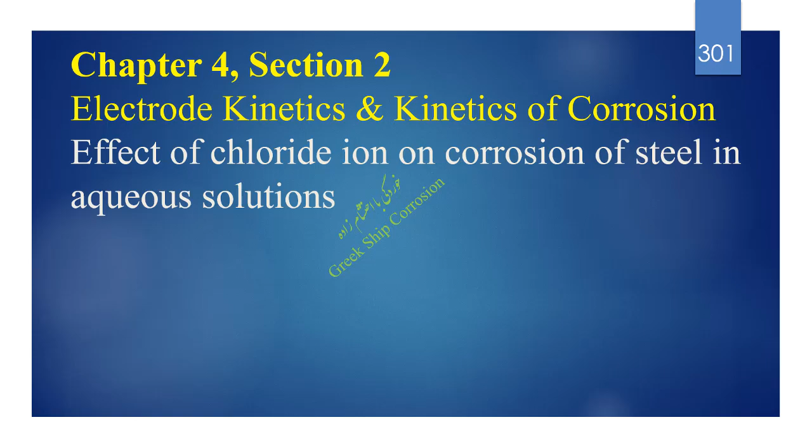The Greek ship, Shipwrecks and Maritime Incidents in 1966. The Greek ship is the nickname of Koula F. She was built in 1943 under the name Empire Trumpet. From 1946 to 1966, she passed through a series of British and Iranian owners and various changes of name. Her final owners were Greek.

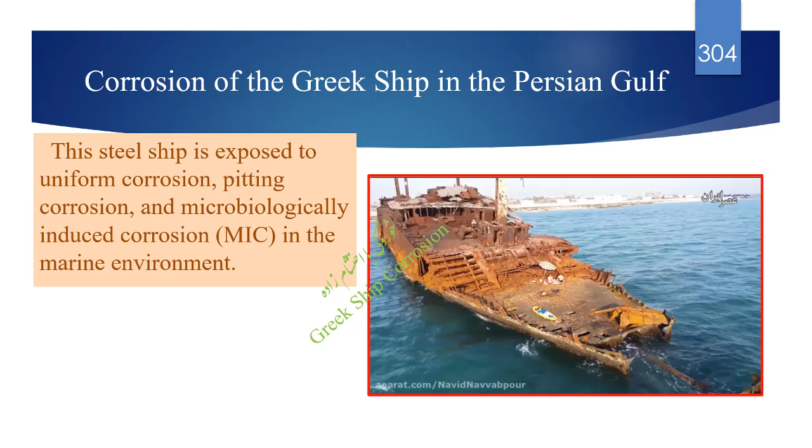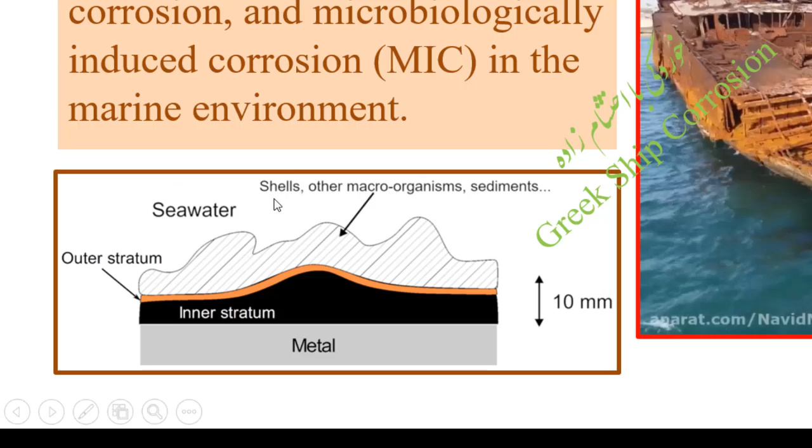On July 25, 1966, Koula F ran aground on the southwestern coast of Kish Island in the Persian Gulf. This wrecked and corroded ship has become a tourist attraction in Iran. This steel ship is exposed to uniform corrosion, pitting corrosion, and microbiologically induced corrosion (MIC) in the marine environment. Metal, inner stratum, outer stratum, seawater, shells, other macro-organisms, sediments.

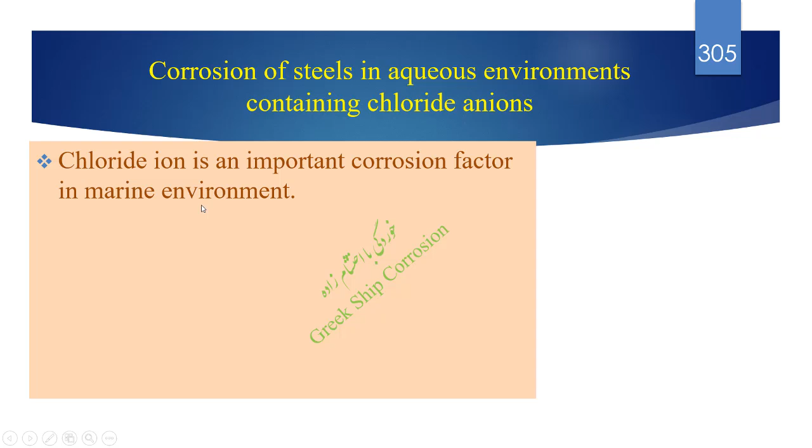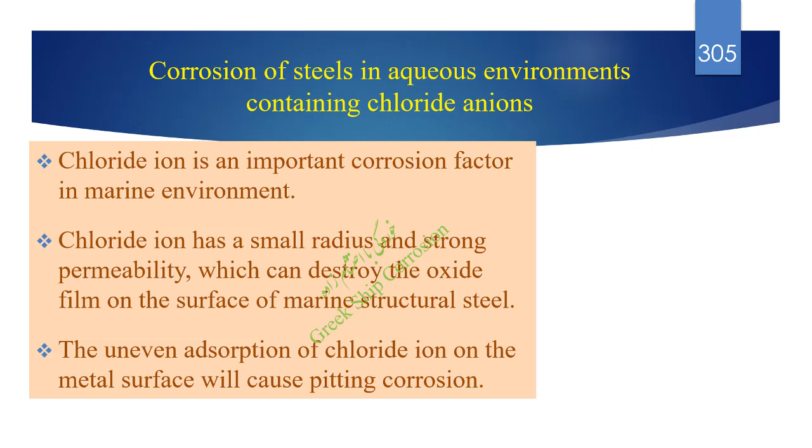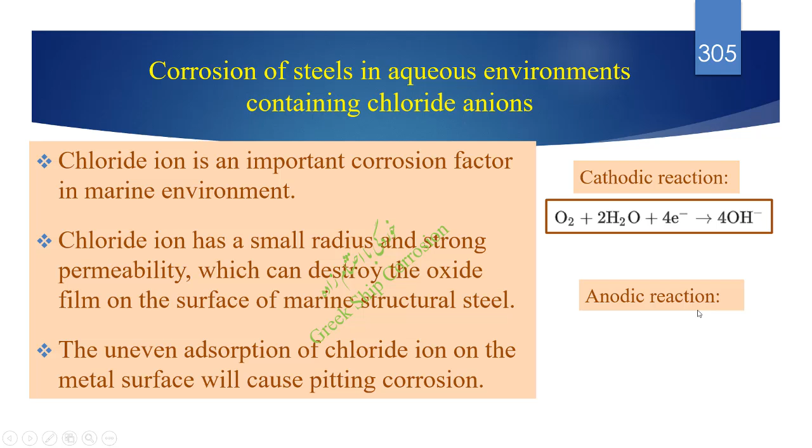Corrosion of steel in aqueous environments containing chloride ions. Chloride ion is an important corrosion factor in the marine environment. Chloride ion has a small radius and strong permeability, which can destroy the oxide film on the surface of marine structural steel. The uneven adsorption of chloride ion on the metal surface will cause pitting corrosion. In this case, the cathodic reaction is O2 + 2H2O + 4e- → 4OH-, and the anodic reaction is Fe → Fe2+ + 2e-.

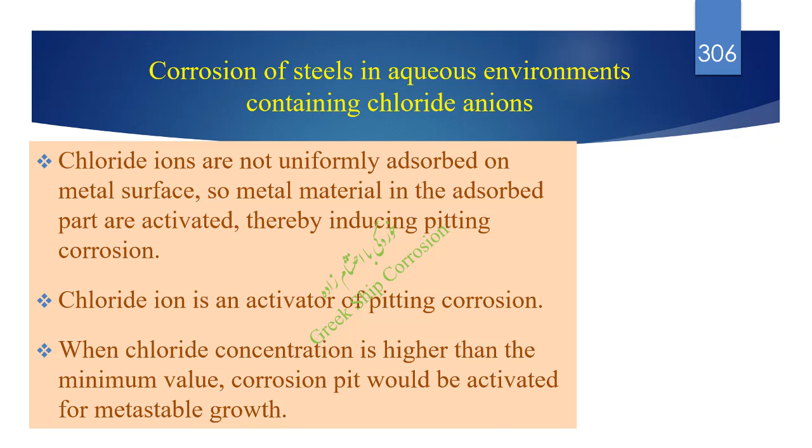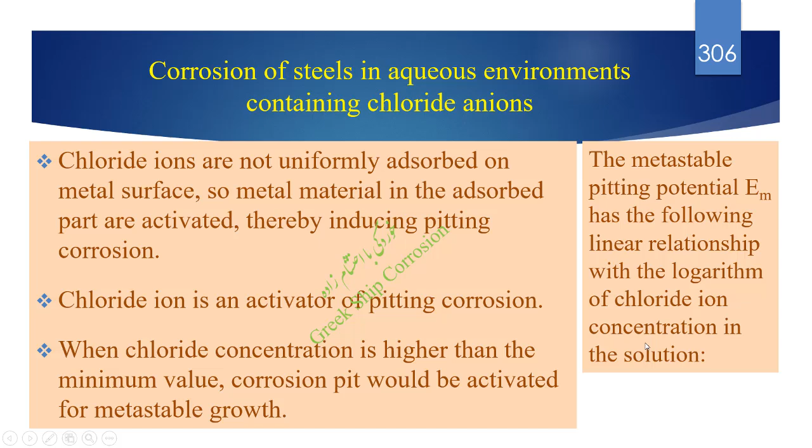Chloride ions are not uniformly adsorbed on the metal surface, so metal material in the adsorbed part is activated, thereby inducing pitting corrosion. Chloride ion is an activator of pitting corrosion. When chloride concentration is higher than the minimum value, a corrosion pit would be activated for metastable growth. The metastable pitting potential EM has the following linear relationship with the logarithm of chloride ion concentration in the solution: EM = -37 log[Cl-] - 212.

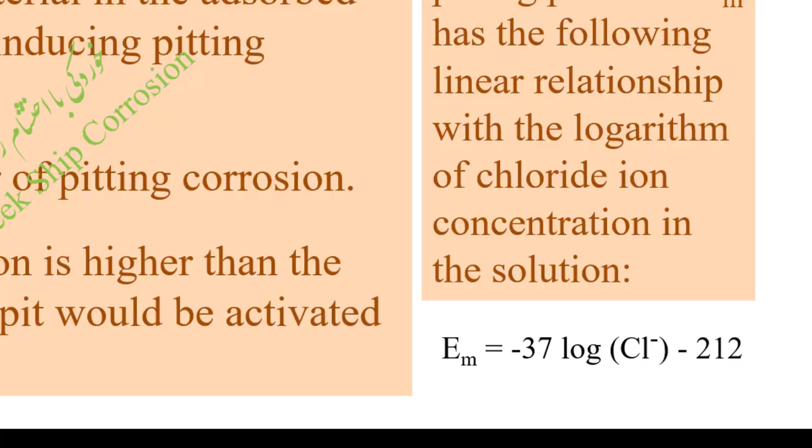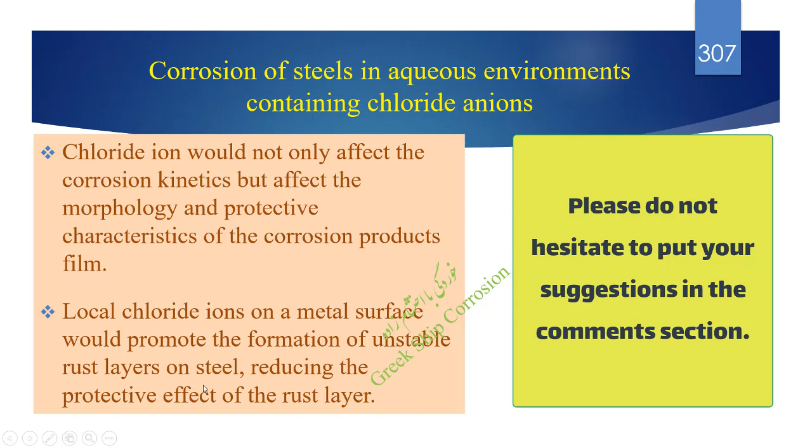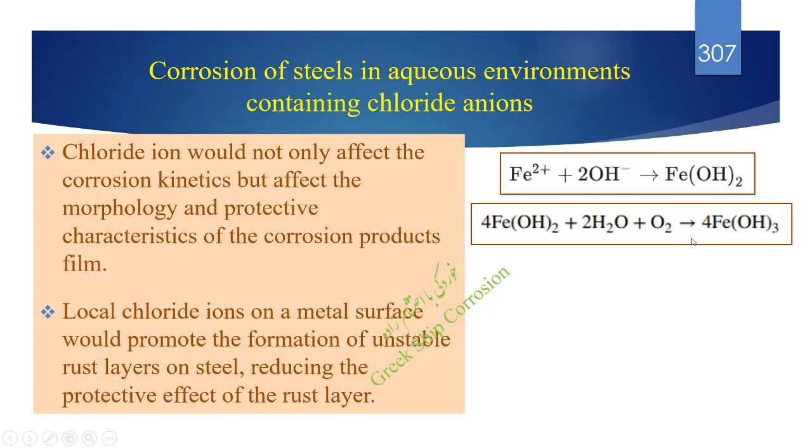Chloride ion would not only affect the corrosion kinetics but also the morphology and protective characteristics of the corrosion product film. Local chloride ions on a metal surface would promote the formation of an unstable rust layer on steel, reducing the protective effect of the rust layer. Fe2+ + 2OH- → Fe(OH)2. 4Fe(OH)2 + 2H2O + O2 → 4Fe(OH)3.

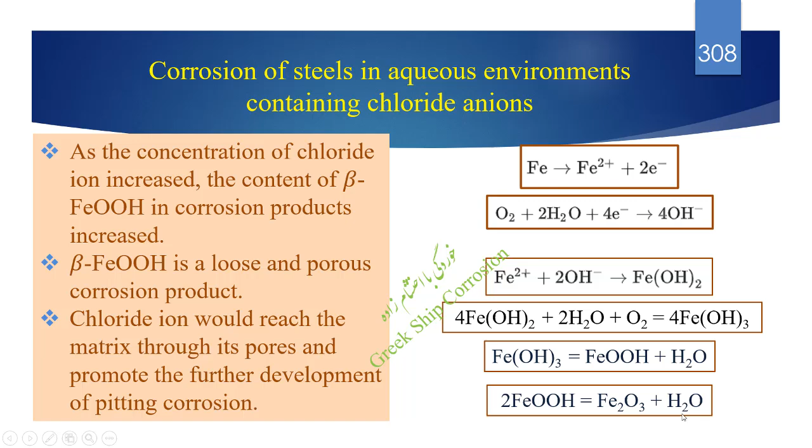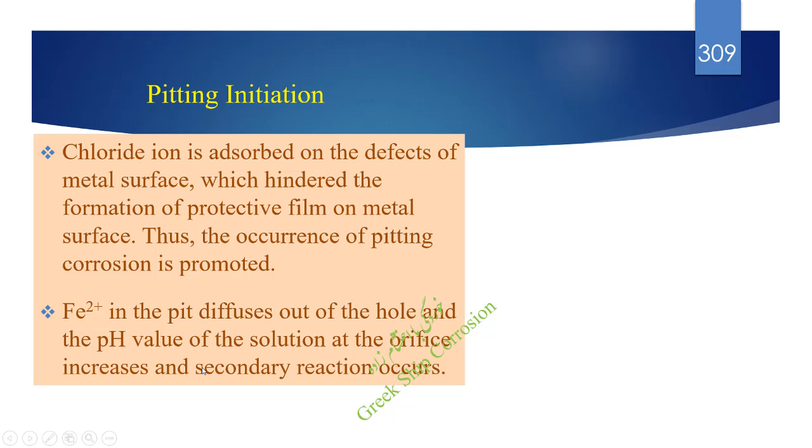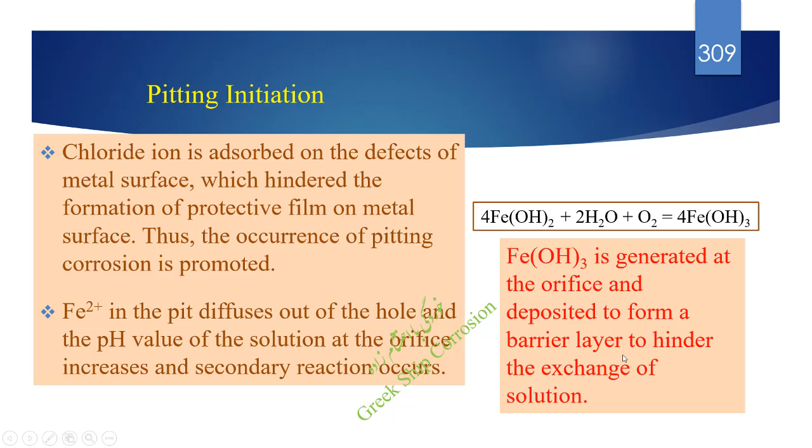Chloride ion is adsorbed on the defects of the metal surface, which hinders the formation of a protective film on the metal surface. Thus, the occurrence of pitting corrosion is promoted. Fe2+ in the pit diffuses out of the hole, the pH value of the solution at the orifice increases, and a secondary reaction occurs: 4Fe(OH)2 + 2H2O + O2 → 4Fe(OH)3. Fe(OH)3 is generated at the orifice and deposited to form a barrier layer to hinder the exchange of solution. Details of the pitting corrosion mechanism are discussed in the video titled Chapter 3, Section 2, number E7.

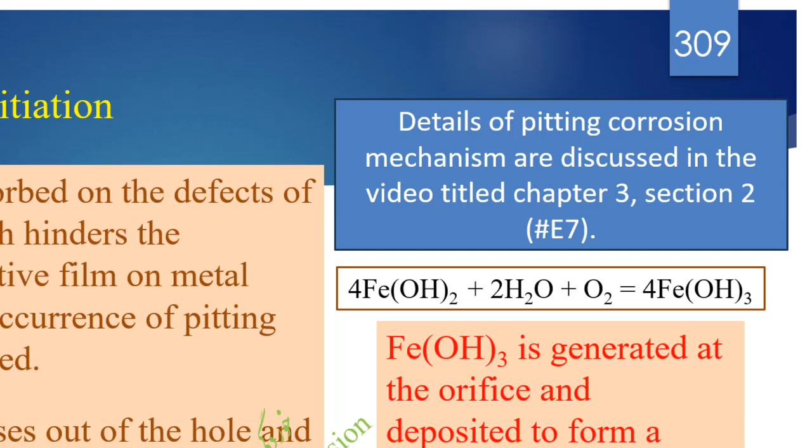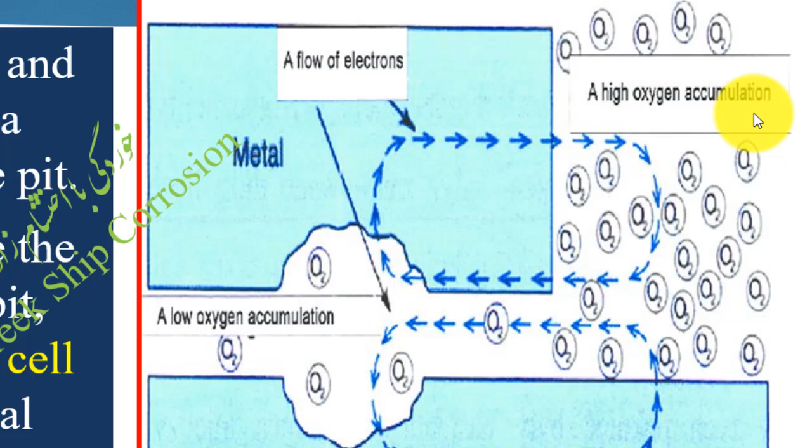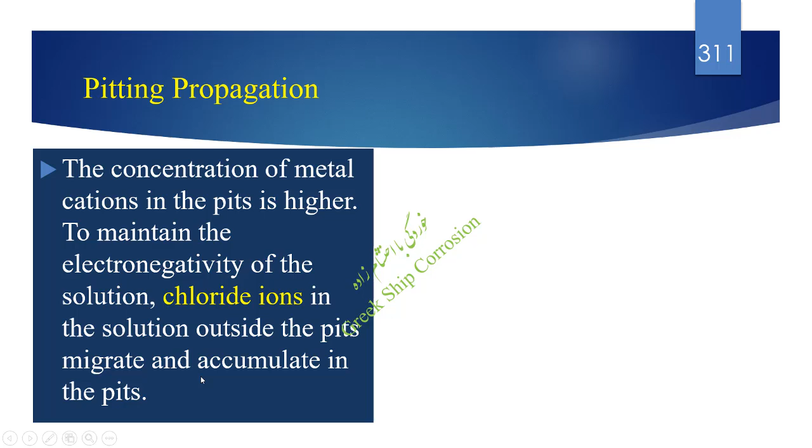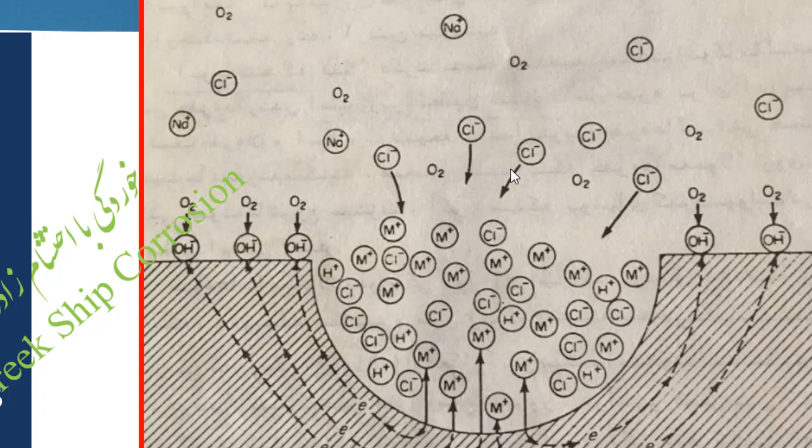Pitting propagation. The material exchange inside and outside the pit is limited, and a blocking area is formed in the pit, with low oxygen accumulation in the pit and high oxygen accumulation outside the pit. The concentration of metal cations in the pits is higher. To maintain the electroneutrality of the solution, chloride ions in the solution outside the pits migrate and accumulate in the pits. Cl-, Cl-, Cl-, Cl-. pH drop in the pit.

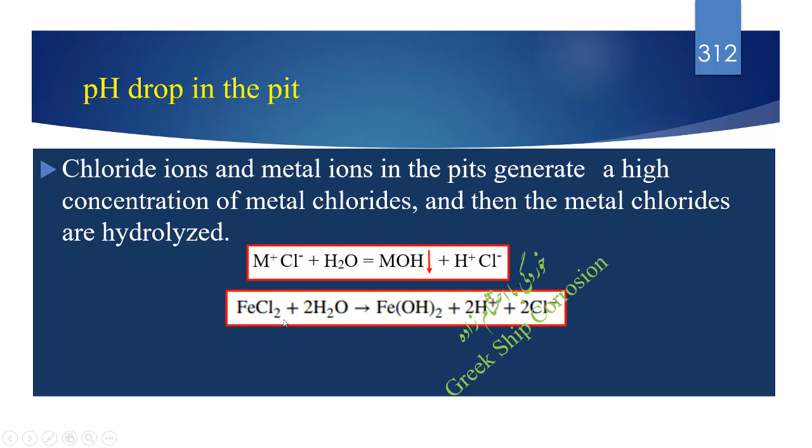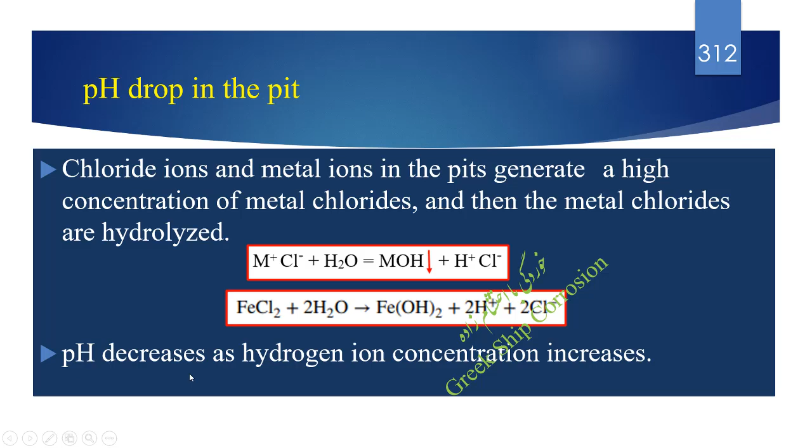Chloride ions and metal ions in the pits generate a high concentration of metal chlorides, and then the metal chlorides are hydrolyzed. MCl + H2O → MOH + HCl. FeCl2 + 2H2O → Fe(OH)2 + 2H+ + 2Cl-. pH decreases as hydrogen ion concentration increases.

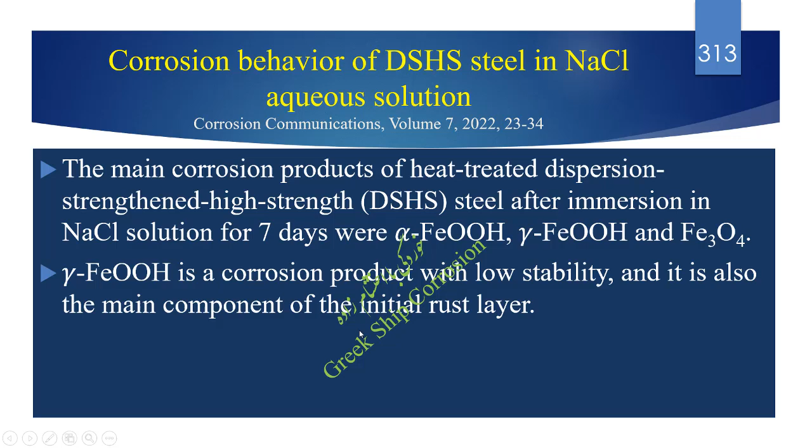Corrosion behavior of DSHS steel in sodium chloride aqueous solution. The main corrosion products of heat-treated dispersion-strengthened high-strength steel after immersion in sodium chloride solution for 7 days were alpha FeOOH, gamma FeOOH, and Fe3O4. Gamma FeOOH is a corrosion product with low stability, and it is also the main component of the initial rust layer. After a certain oxidation-reduction reaction, it would be transformed into Fe3O4, which is more thermodynamically stable.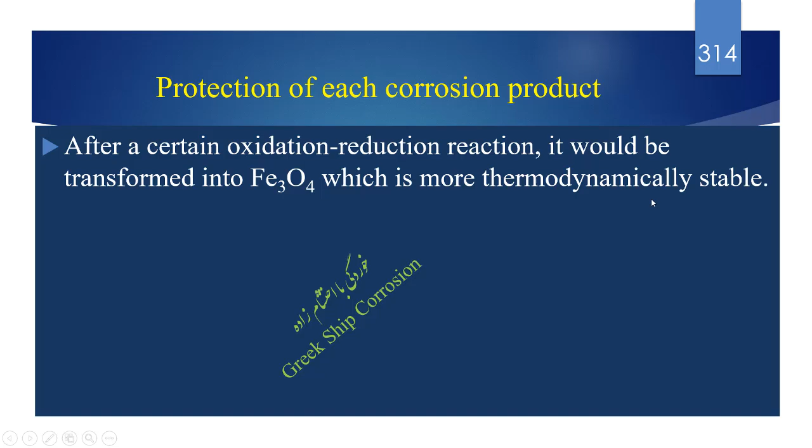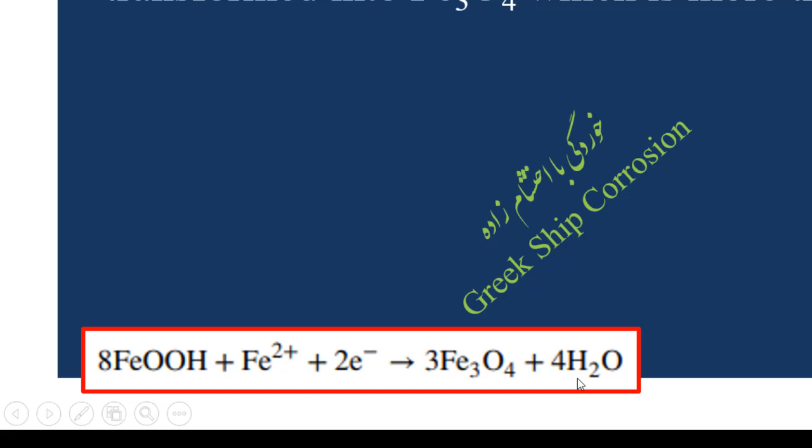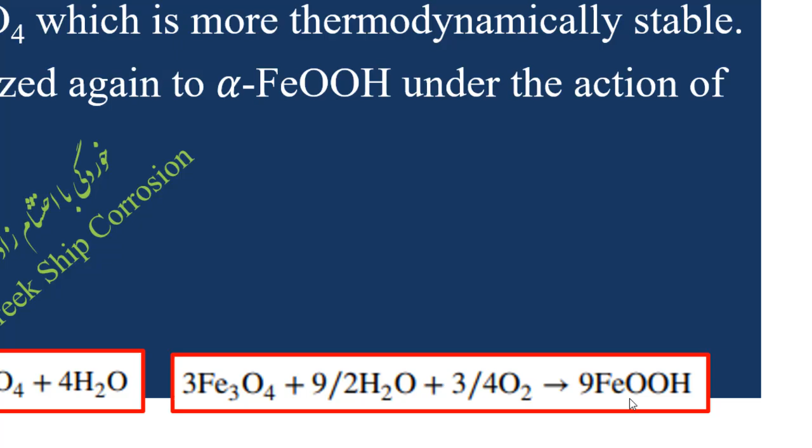8FeOOH + Fe2+ + 2e- → 3Fe3O4 + 4H2O. Fe3O4 would be oxidized again to alpha FeOOH under the action of oxygen: 3Fe3O4 + 9/2 H2O + 3/4 O2 → 9FeOOH. Alpha FeOOH is the protective phase in the rust layer. The protection of each corrosion product is as follows: alpha FeOOH is more protective than Fe3O4, and Fe3O4 is more protective than gamma FeOOH.

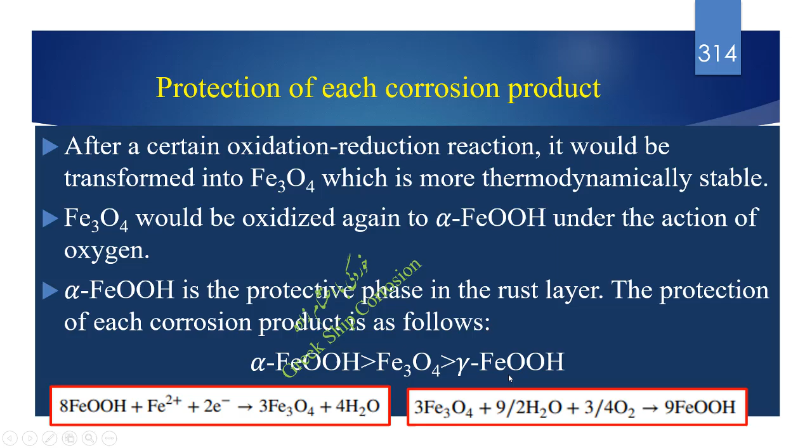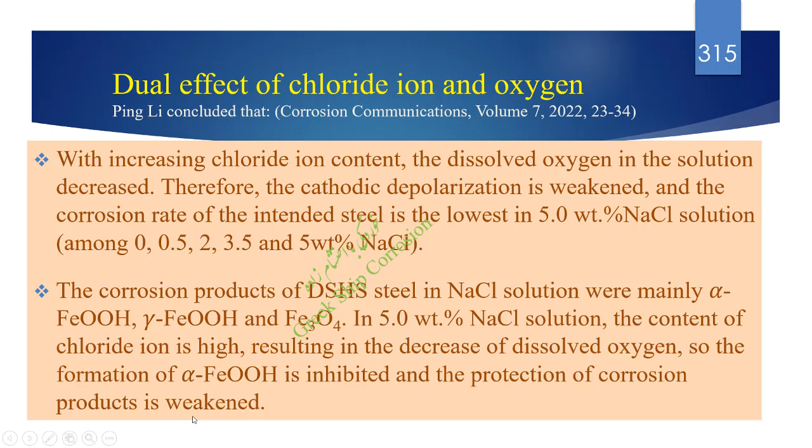Dual effect of chloride ion and oxygen. With increasing chloride ion content, the dissolved oxygen in the solution decreased. Therefore, the cathodic depolarization is weakened, and the corrosion rate of the tested steel is the lowest in 5 wt% NaCl solution among 0, 0.5, 2, 3.5, and 5 wt% NaCl. The corrosion products of DSHS steel in NaCl solution were mainly alpha FeOOH, gamma FeOOH, and Fe3O4. In 5 wt% sodium chloride solution, the content of chloride ion is high, resulting in the decrease of dissolved oxygen. So the formation of alpha FeOOH is inhibited, and the protection of corrosion products is weakened.

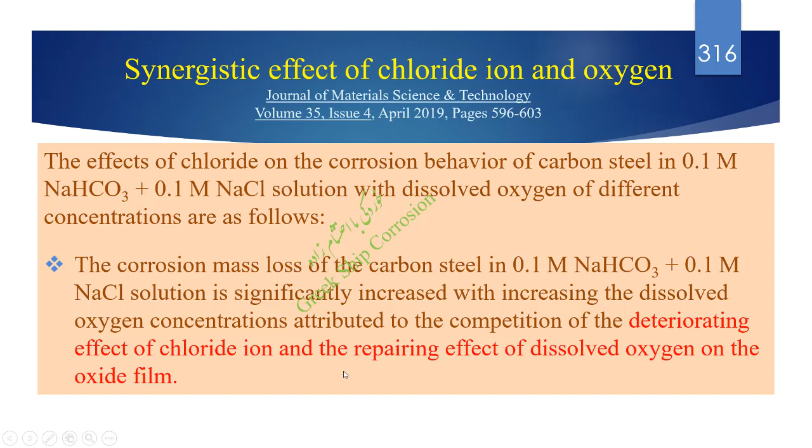Synergistic effect of chloride ion and oxygen. The effects of chloride on the corrosion behavior of carbon steel in 0.1 M sodium bicarbonate plus 0.1 M sodium chloride solution with dissolved oxygen of different concentrations are as follows. The corrosion mass loss of the carbon steel in this solution is significantly increased with increasing dissolved oxygen concentration, attributed to the competition of the deteriorating effect of chloride ion and the repairing effect of dissolved oxygen on the oxide film. With the immersion time going by, the corrosion potential of the steel is promoted as a result of the accumulation of the corrosion products.

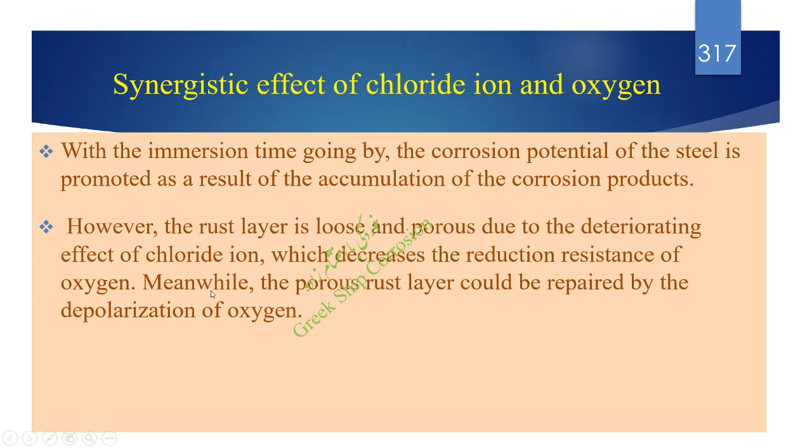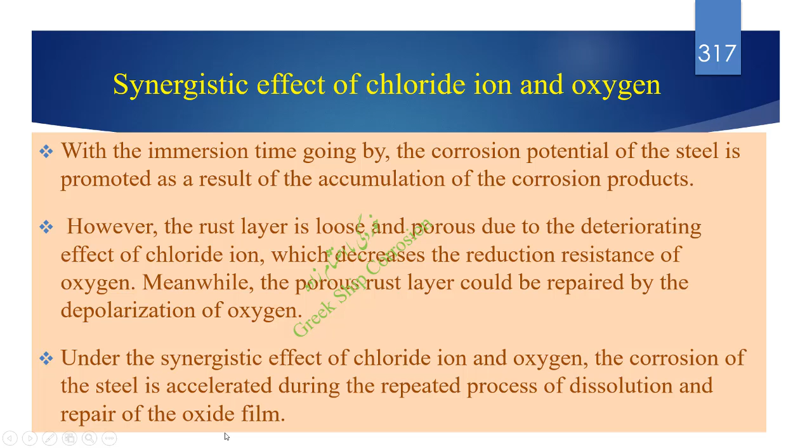However, the rust layer is loose and porous due to the deteriorating effect of chloride ion, which decreases the reduction resistance of oxygen. Meanwhile, the porous rust layer could be repaired by the depolarization of oxygen. Under the synergistic effect of chloride ion and oxygen, the corrosion of the steel is accelerated during the repeated process of dissolution and repair of the oxide film.